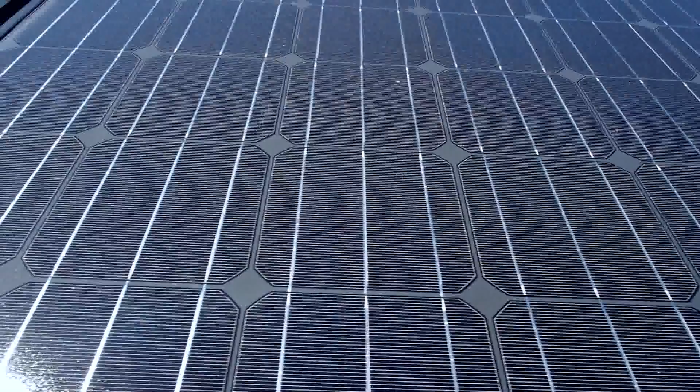10 years later, we're going to talk about BIM, and the focus isn't going to be on BIM as a piece of software. BIM is not software, BIM is a way of thinking and a mode of delivery, and that's what we're going to talk about today.

When I use the term BIM, I use it as a verb, so it's building information modeling, but the action is building. So it's BIM the verb as opposed to BIM the noun. The noun would be the model, the verb would be making the model. So you can BIM anything, and it's essentially the characteristics of what it is, why it's there, and the information about it.

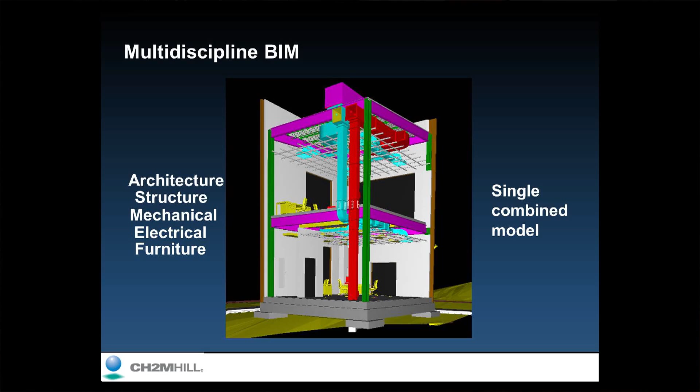So BIM is multidiscipline, and in this presentation I'm going to be alluding to facilities. So when I say multidiscipline BIM, we're thinking of buildings here where you've got, in this image, architectural components in the same space as the structural components, same space as HVAC, lighting, furniture. Notice they're all sitting on the site. All of those components form a combined whole.

The whole concept of BIM is that we're all working live in a virtual environment, developing a model as it would be constructed on site prior to ever digging the first shovel into the ground.

BIM is geometry plus information. And for me, this is fundamental, because when we talk about BIM and we deploy BIM, architects or engineers will say, well, I run a small practice, BIM is expensive, BIM is new, I need training, I need software, I need hardware, I need all these wonderful things. I always ask them first, well, do you even know what BIM is? Other than you need software and hardware and training and all the expensive things.

This is the fundamental thing. So if you look at this room, you've got walls and ceilings and floors, acoustic panels, projectors, chairs, finishes on the floor. You've got all this wonderful stuff. So imagine designing this space. The model knows what all of these things are. And that's a huge fundamental difference from if I was doing a project outside of BIM.

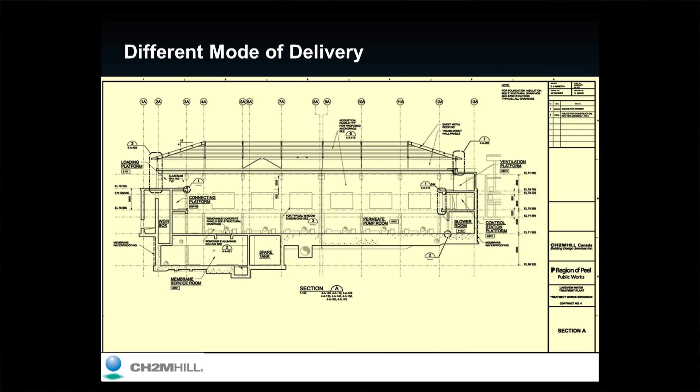There is nothing special about that drawing, other than the fact that I have to produce it and put my stamp on it, because that's the form of contract. This is what it's all about. That drawing is a simple cut from this model. This model is the single source of truth.

If you go to a BIM presentation and you hear somebody saying BIM is a paradigm shift, I've heard that I can't tell you how many times. What's the real shift? Things happen here, not in the drawing. That's all. I want to make it sound so simple, because it is.

When you think about BIM, think about how you think. When we're all designing, whether it's structural, civil, mechanical, electrical, or architectural components, we're thinking of the component itself. I'm not imagining drawing this thing. How does it look in plan? How does it look in section out here? How does it look right here in the physical space? That's the first thing I'm going to design. That's what the model facilitates.

Drawings are a simple output — press a couple of buttons, I get a drawing. And then all the other information comes as a byproduct.

The other thing we push, more of a behavioral thing, is let's try to make decisions and stick to them. I am an architect, and I will be the first to make fun of architects. There are so many out there who want to design, change, reiterate, go back to the engineers and change things. Engineers are the same. I've seen beams that are like this, then like this, then like that. Why are the beams doing all these crazy things? We have this back and forth dynamic, and my argument is, let's do that when we need to.

If you're familiar with four-phase design, that really started with the American Institute of Architects — CH2M Hill, we deploy that wholeheartedly. So: conceptual design, schematic design, design development, contract documents, and then you're into construction.

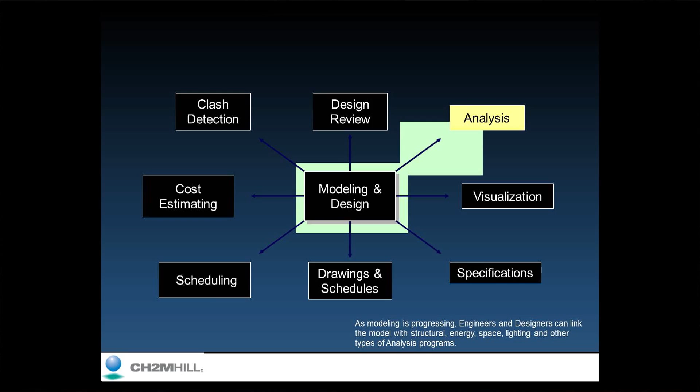That's all I need. I can model this room literally in seconds and then bring it into an energy analysis tool, and it should tell me that I'm going to lose some energy through those windows. But if I call the windows another type of wall, it won't tell me anything. If I call the ceiling a slab, it won't know I have a ceiling and it'll think I have an unenclosed space and there is no energy anywhere. I'm just open to the world, right?

So fundamental things like that—use the tools, use them intelligently, and all of a sudden we have the ability to analyze. Structural analysis is fun as well. You've got beams—well, if you don't call it a beam and you pull it into a tool like STAAD or RAM, it's not going to know it's a beam. It's not going to know your column is a column.

So we have that interesting case where, let's pretend there are columns behind those panels there. Well, if somebody modeled them as walls, you pull it in and you're just going to think your building's going to fall because there's nothing holding up your beams, right? So it's little things like that where all of a sudden the doors to the analytical possibilities are completely wide open.

Visualization—push a button, you see the model, right? So you come up to as early as 30%, I can take a model, literally hit print screen, send it off to my client, and they can see how the building looks, how the space looks, a structural section, how it looks on site. They can see access roadways, they can see everything because it's right there sitting in the model.

Specs are pretty state-of-the-art now, which is sweet. So if I model this space, most BIM tools today will understand that if I have concrete masonry unit, that's a Division 4 spec. If I have metal panel wall paneling, that's most likely Division 7. Flooring is Division 9. Windows are Division 8.

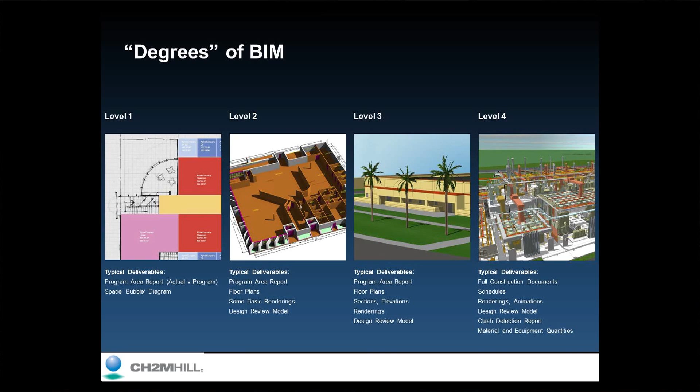And they said to us, can you BIM us telephone jacks? So we sat down and we said, well, we didn't know, right? So we sat down and said, well, what's a telephone jack? It's a rectangle that's about that thick. Okay, so it's pretty easy to model - you model a little rectangle, copied all around the place. What's unique about that? You've got to know it's a telephone jack.

So we wrote a little data piece to say telephone jack. And they wanted a number - they wanted a number to match their asset management system. So we gave them all numbers. All of a sudden we BIMmed telephone jacks, and we were able to give them a listing. That's the wheel of BIM I just talked about.

I built this slide for the London Olympics, and there we were looking at, well, what do you do with the data, right? So when you think of modes of work, you can have a consultation, so design bid - I do the design, we send it out to bid, it gets tendered.

I, the architect, or I, the engineer, am not involved in construction. I'm just kind of being engaged. The building code says we have a general awareness of what's going on during construction, and at the end of the day, we can generally say that it met our intent. So that's very ambiguous, and we're really not responsible.

On a design build, we're the contractor. So all of a sudden, we spent maybe a year building these design models, and now we are this contractor, we have all this information. Well, what do we do with it, right? So when I said drawings are an output, this comes heavily into play with work packaging for design build projects.

I, the contractor, will call my precast up, and I'll give him the information he or she needs. I don't have to give them, well, this is all the drawing shows, please interpret it. I've got models, I know what all the components are. I can isolate all the components. I can give them just what they need in a specific work package.

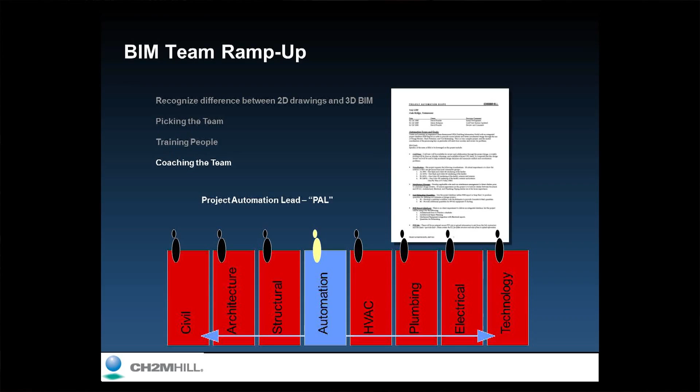A project manager will come to me and say, Brent, 50 years ago, 20 years ago, architects took 40 hours of drawing to draw, and then we got CAD and it took 40 hours to CAD it up—do you still need 40 hours of drawing? I said, if you're going to give me that, fine, but I don't need 40 hours. I can do what I used to do in 40 in 30 or 20, and I've demonstrated that, because of BIM.

So now when they give me 40 hours of drawing, I give them drawings and renderings and videos and all these wonderful things because I have a model. And they believe me now—before they thought I was full of it 10 years ago, now it's impossible to doubt.

Once you start doing BIM, you're going to connect, you're going to create content, your content's going to be intelligent. I'm not going to model that door from scratch every single time—I'm going to model it once, give it the right data. If I schedule it, I know I can get the schedules I need for my architectural content.

If there's an electrical component on it—card readers, electrical strikes, whatever—I have the BIM data inputs I need, so I can send that information to the electrical engineer, and I have this intelligent control component that I'm going to manage and preserve. Preservation is critical—how does BIM become more efficient? I build all this content I'm going to model, and I keep reusing it and building more and more. Your library becomes massive.

Software vendors help us as well. As we build content, we all collaborate—all of our competitors actually play kind of nice with this, because what we build, we give to the vendors, and what they build, they give in the next version of the software.

There's all this cool new stuff in the software. Autodesk has Autodesk 360, and they offer their own cloud solution. Bentley has a cloud solution. What we find difficult with third-party hosted cloud software is ensuring security of our data, especially when we have clients who will insist that the data must remain within our networks. So we had to devise a cloud solution for ourselves, internal to our environment.

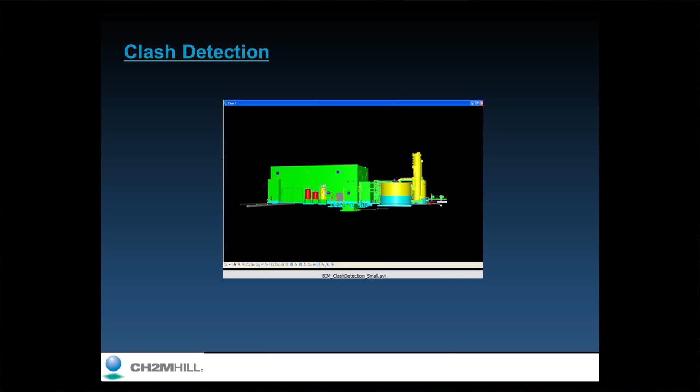Once we've done all that, now we talk about how do we leverage cloud computing. Some tools do things better than others on the cloud. Here's an example of processing and reading interferences - we're able to take the models from our system and scan them for interferences, leverage the data, see what's hitting what and why, and figure out whether it's a good clash or a bad clash.

When I say a good clash - if it tells me I've got a table sitting on the floor, so what? That's a good clash, I probably want the table to sit on the floor. But if it tells me I have a beam going through a window, that's a bad clash, and it'll identify it for me.

What we've done is try to take the most restrictive of all the codes. For example, IBC says maximum rise is 7 inches, 180mm. Alberta code and National code say that too, but Ontario code says 200 millimeters, not 180. So when you're doing your design, your BIM tool says 180 - if you put your riser at 200, it'll give you a warning saying you're outside the riser constraint, and you accept it because you're in Ontario. There's no way the tools can cover every building code, but they've tried to look specifically at North American data sets to get what's mostly common amongst all the codes.

It was actually a little pump house on a golf course. The client wanted to see elevations, and then they wanted to see if we could give them a rendering or whatever.

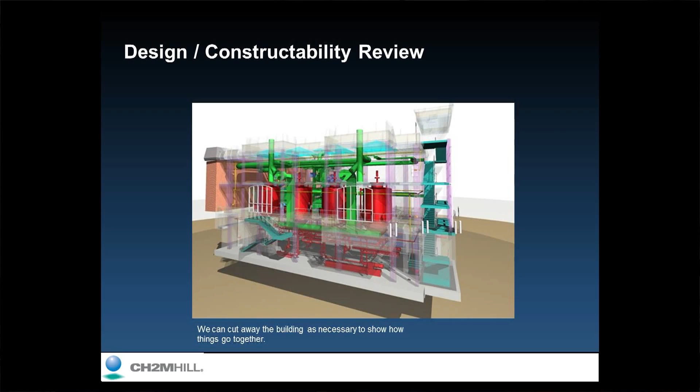And I just kept pressing the button, and said here you go, a rendering of a pump house. The PM kept asking how I was doing it so quickly, and I said it's because I'm modeling it - that's just how we do our work. Think about a 5x5 pump house: 4 walls, ceiling, roof, 2 doors, 2 louvers. What does it take to do that? I would have spent more time drawing plan, section, and elevations than I did modeling it, for sure.

So you can do photorealistic rendering - now you can watch as it's rendering. It takes a little time to regenerate graphics because it's actually doing the materiality as well as the components. But this is live in the model. So when I'm actually building this thing, whatever tool you're using, you just hit the walk command and start walking through.

This is where my senior reviewer will come over and say, hey Brent, can you show me blah blah blah. I just sit them down, hit walk, and say what do you want to see, buddy? And if they say I don't understand that, I'll cut a section and show them. You have all these manipulations at your fingertips because you're able to let them understand without having to stop, press print, go find the drawing, cut a drawing - such a waste of time. You can tell how much I love drawings, right?

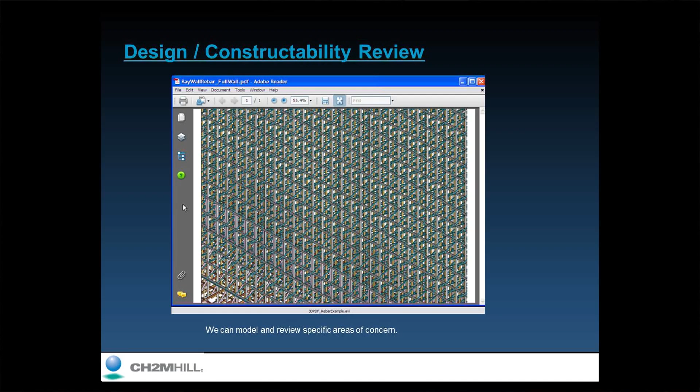This was great - this was a nuclear facility. We required a 4-hour fire rating and a certain PSI blast protection on the nuclear waste storage. The contractor said there is no way that rebar is going to work. So our structural engineer said, well, I'm going to get one of my savvy modelers to model a section of the rebar.

So they put this thing together and put it into 3D PDF, that's all it is. You can interact on a 3D PDF, and we were able to actually show them the configuration of the bars and prove to them that when you pour the concrete, the aggregate will fall between the bulk of these bars, and we should have something that will work. The contractor said, I think I can give it a try.

This is, again, a 3D PDF. Any BIM authoring tool can export to PDF, and you can enable walking capability - you're just able to drive through the model. It's a PDF, so it's really dumbed-down graphics, but just imagine you're working on a model of anything - sites, buildings, whatever you're working on. You hit print to PDF, send it to your client and say, here, open this in Adobe Reader and drive. This is simulation.

So this one here shows how this building was built - you can tell we did this 12 years ago. This was one of our first BIMs where we wanted to show how it's built, and we actually found a huge gap in how we were working back then. That helped us to continually stress modeling it as it will be constructed, not any other way.

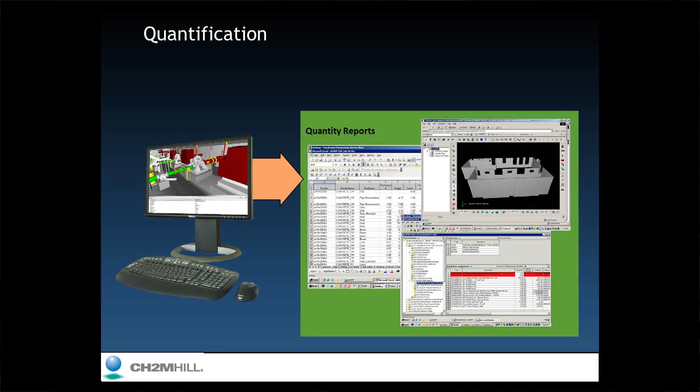Quantification is pretty big for us. And when you link it to schedule simulation, there's a nice conflict there, right? If I need to quantify that concrete slab, I just need to know that it's a concrete slab. But if I need to simulate that concrete slab, I need to understand how it's going to be poured, and that's a huge difference, right? Imagine the pours on a 500-meter long concrete slab. If we're in design, we may not know. If we're the design build contractor, the contractor might be able to give us advice on that. But we need to understand, if the goal is simulation, I need to account for that. If the goal is quantification, I don't really need to think about that.

And then we talked about energy analysis. So heat recovery, heat gain and loss, sustainability, daylighting, and structural analysis are the most critical ones that we've used internally, with heavy emphasis on LEED. So in North America, more and more clients are asking for LEED Silver as a minimum, and oftentimes they'll say to us, we don't want to pay for LEED certification. Everybody know what LEED is? I'm just assuming that everybody does. Okay, cool, so that's that sustainability rating.

The municipalities are saying design to LEED. I'm not going to pay to certify my building, but I want you to prove to me that it's certifiable. So we still have to do all the sustainability requirements and not actually apply for certification.